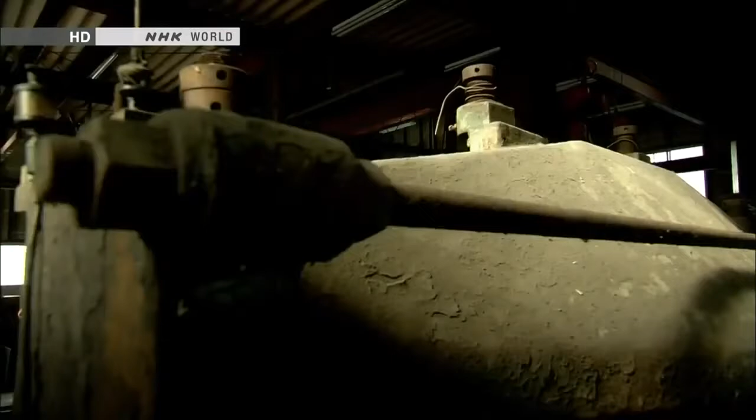In a workshop near Mount Fuji, a curious being has appeared. It's 3.8 meters tall and weighs 4 tons. It is a giant humanoid robot named Kuratas.

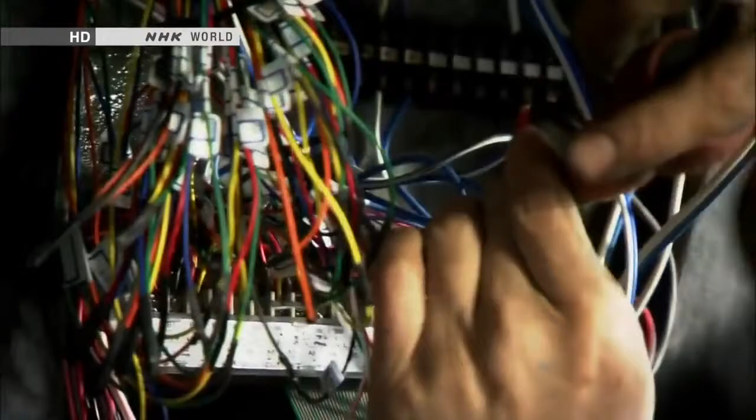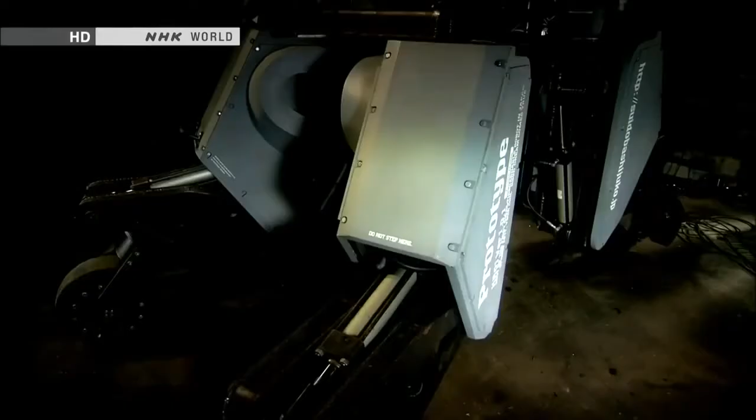Kuratas is a contemporary artist's creation. He holed up here for 2 years, building the robot with input from an expert. He calls Kuratas a work of art, but it's a sophisticated piece of machinery. A person seated inside can control the robot, move its limbs, and grab things. The artist says he was inspired by robots in science fiction tales and animation. That vision sustained him as he worked in solitude.

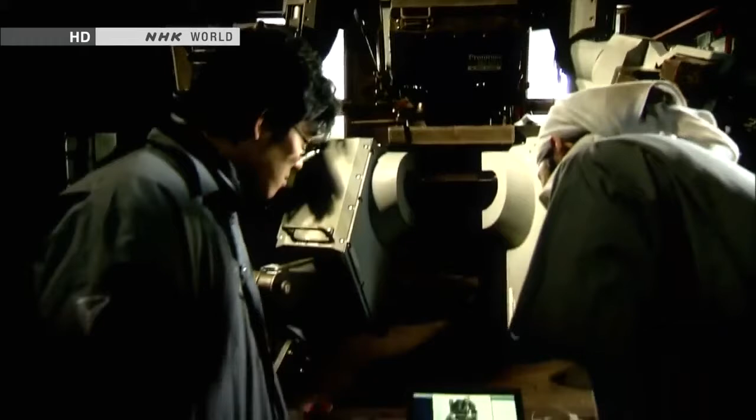Things that were once unthinkable are becoming real. How will robots evolve? Well, military applications could be one option. They'll probably become more and more like humans. They could surpass us in strength and ability.

People long dreamed of creating these extreme machines. Now, humanoid robots are here. They think like we do, move like we do, and even sacrifice themselves for us.

We want our robot to change society, because robots must be useful. Electronics and computing, progress in vision systems, there's many pieces of it. We will see much more capability continue to grow.

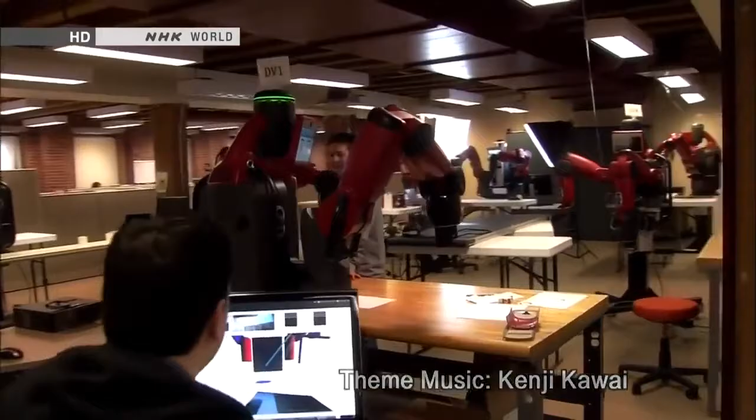Since the Industrial Revolution, people have entrusted some jobs to machines. But there may come a day when humanoid robots do much more complex jobs. Then, what will people do?

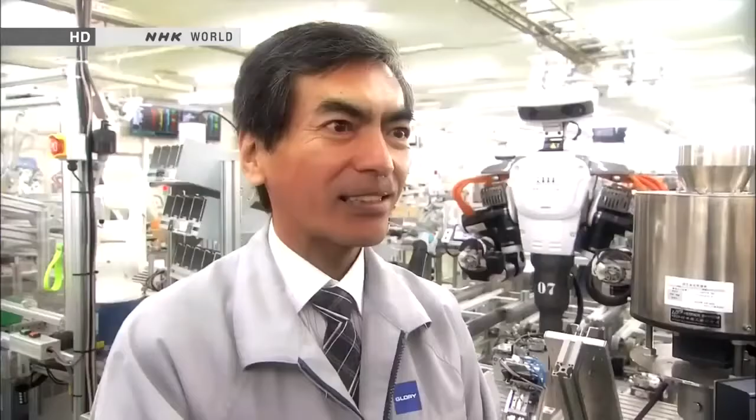You'll see more and more robots doing things in society, whether it's manufacturing or service applications or home healthcare applications. The key will be skillfully dividing labor between humans and humanoid robots.

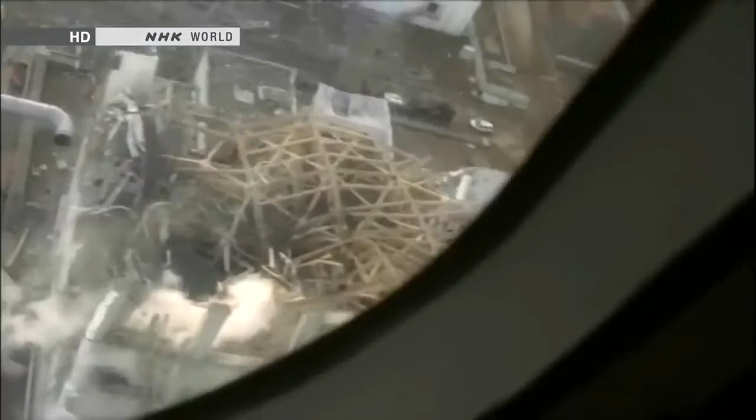The disaster that hit Japan in March 2011 accelerated efforts to develop robots with human traits. The Fukushima nuclear accident left people powerless.

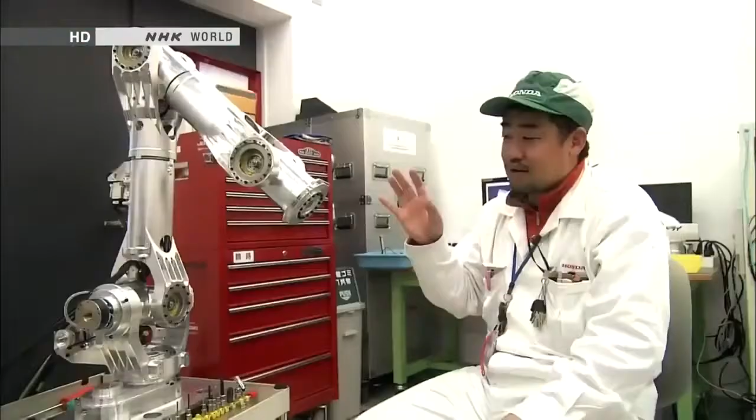By joining forces, we can make a truly useful contribution. Only a humanoid could do it. Or the day will come when robots will really assist mankind. The nuclear disaster in Japan sparked explosive advances in humanoids at the front line of robotics development.

This program explores the future that's fast approaching.

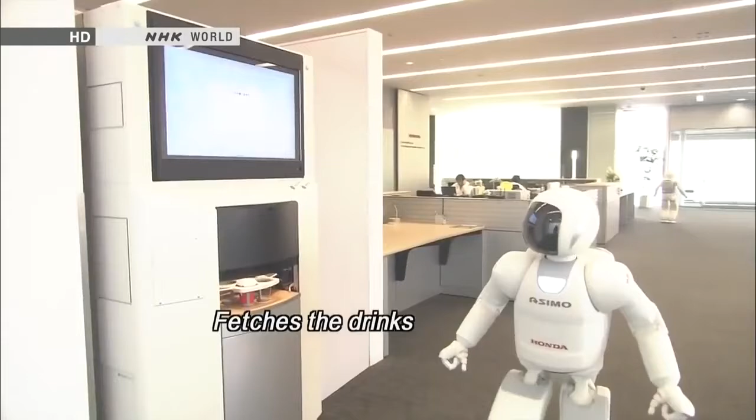Asimo was created by Honda's research and development subsidiary. We were allowed to film their top-secret robotics laboratory.

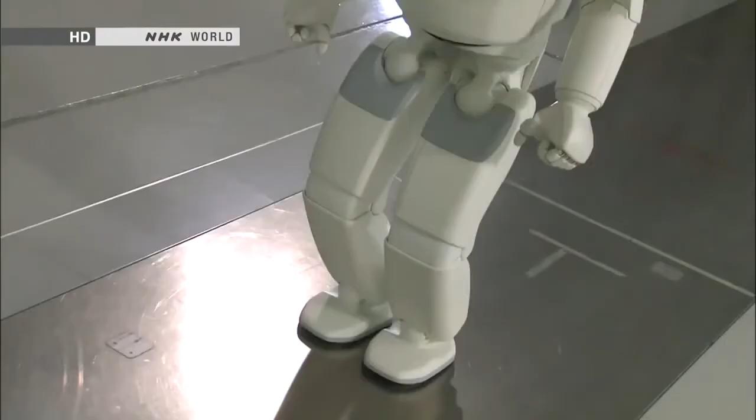Japan is a worldwide leader in the development of humanoid robots. Asimo is the country's crowning achievement. Engineers continue to make improvements.

Asimo's most innovative feature is its advanced intelligence. The robot can think and act on its own without human intervention.

That's made possible by sensors that replicate our 5 senses.

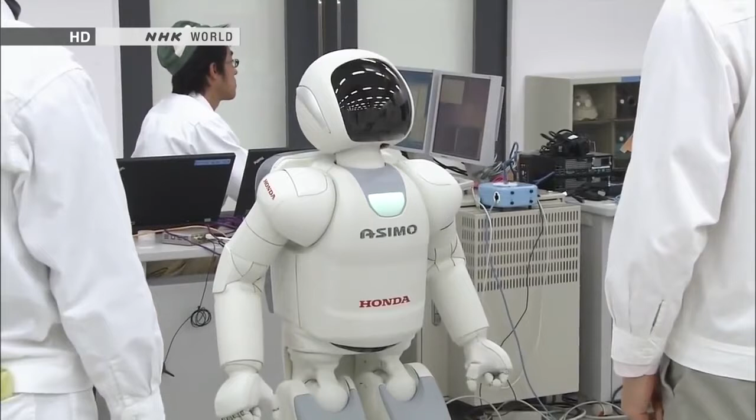It uses them to listen and engage in conversation.

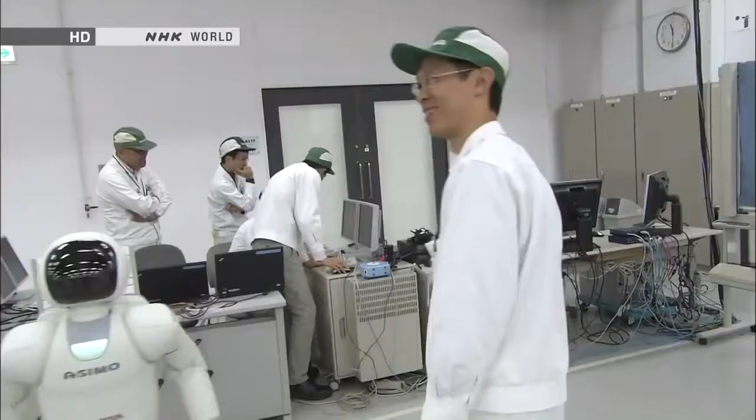2 cameras work as eyes. They can detect humans and use stored data to identify them.

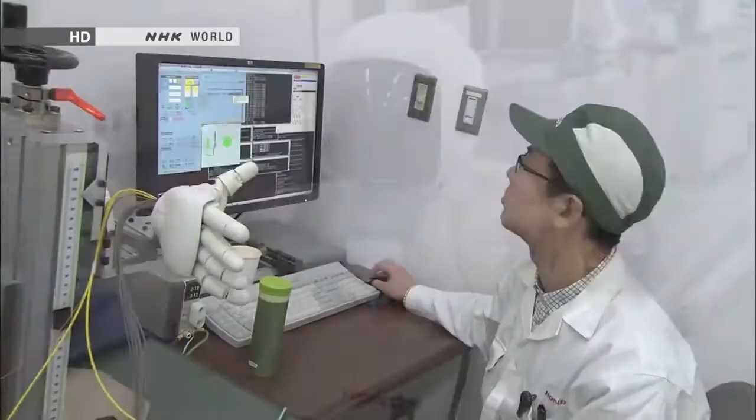Asimo also has a sophisticated sense of touch. Its fingers can make subtle movements, like a person's. Sensors are embedded in the fingertips, too. They can gauge the hardness of an object, like human fingers do.

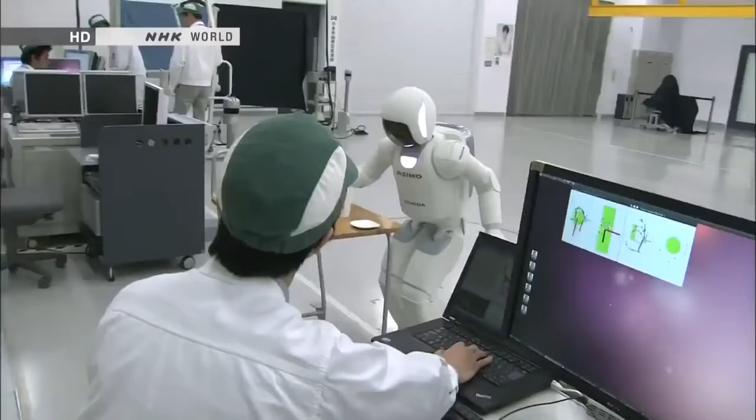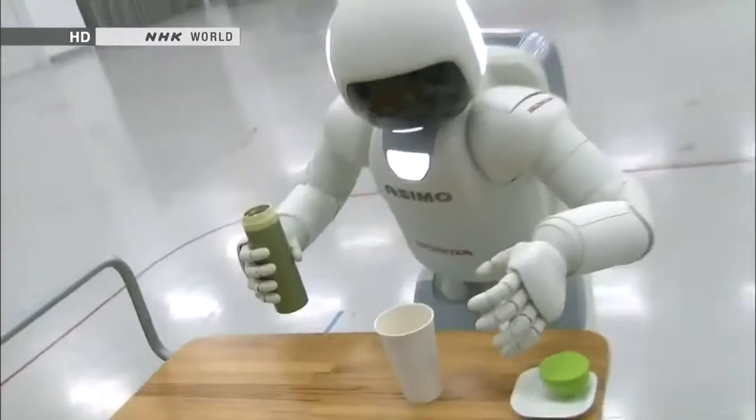Most robots use a fixed amount of strength to grab things. But Asimo exerts more power to open a tightly sealed water bottle and less when holding a paper cup. Its artificial intelligence uses information from the fingertip sensors to adjust the grip.

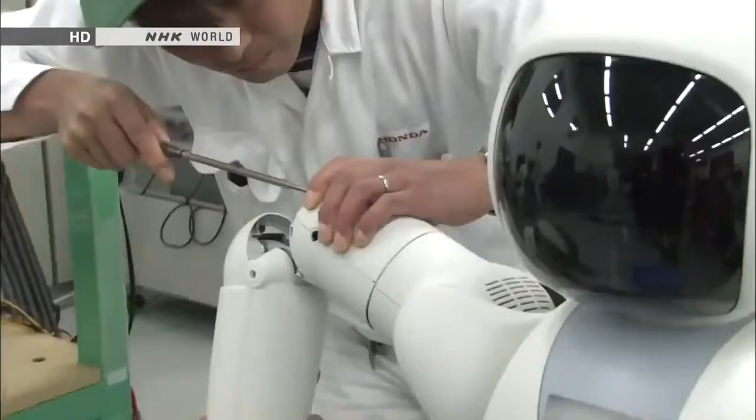The developer's ultimate goal is for Asimo to be a valuable partner that coexists with humans. The engineers who created Asimo all grew up watching animated shows about robots, such as Astro Boy, Doraemon, and Gundam. They dreamed of someday making their own.

Satoshi Shigemi is the development team's leader. He has been designing robots for the past 16 years.

From the beginning, we wanted to design a robot that could help people. To realize that dream, we're constantly asking ourselves what kind of robot would be able to change society, make people happy, and make life easier for people around the world.

Our idea is to create a robot that will change how people live. We're working through the technological issues one by one in order to reach that goal.

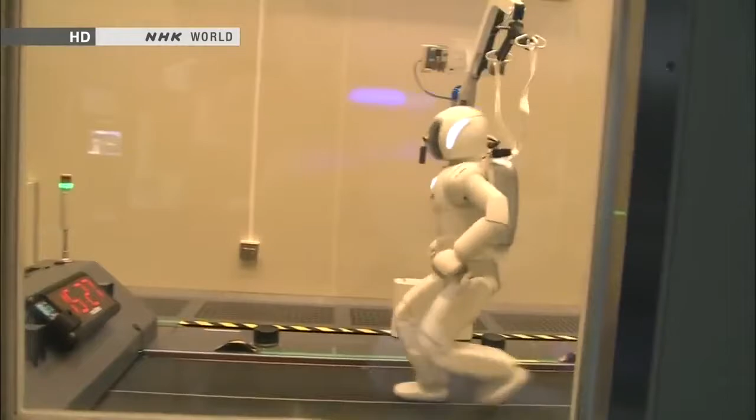Asimo's advanced physical capabilities are revolutionary. The robot can walk and run. It can reach speeds of up to 9 kilometers an hour.

For robots, walking is much easier than running. When running, both feet momentarily leave the ground. Balancing in midair is no easy task.

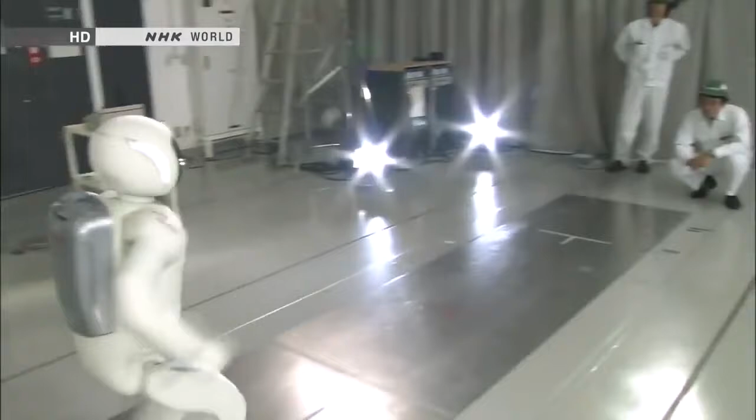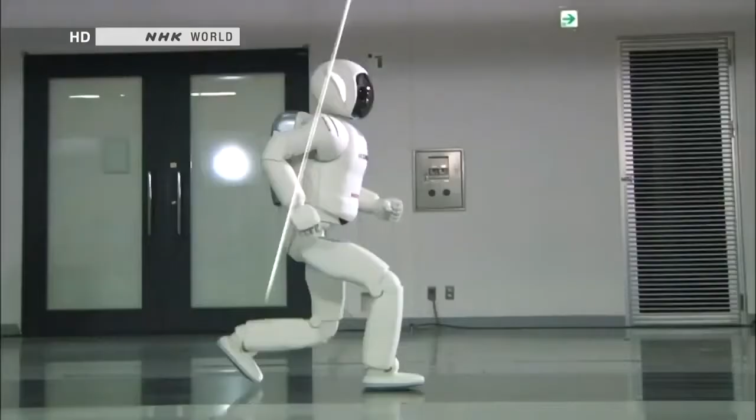Maintaining posture while jumping or floating in the air was a major technological breakthrough. Asimo leans its upper body slightly forward to maintain overall balance, going forward straight in the air. Sensors in Asimo's waist measure the robot's angle, and it leans slightly to compensate, forward or back, side to side. That's how it stays perfectly balanced in the air.

Asimo has been evolving ever since development began in 1986, much like a growing child. But something happened that made researchers realize Asimo's real-world limitations.

It was the accident at Tokyo Electric Power Company's Fukushima Daiichi nuclear plant. The damaged reactors released radioactive substances, making it difficult for humans to deal with the crisis. People needed something that could confront the dangers and bring the plant under control. Robots.

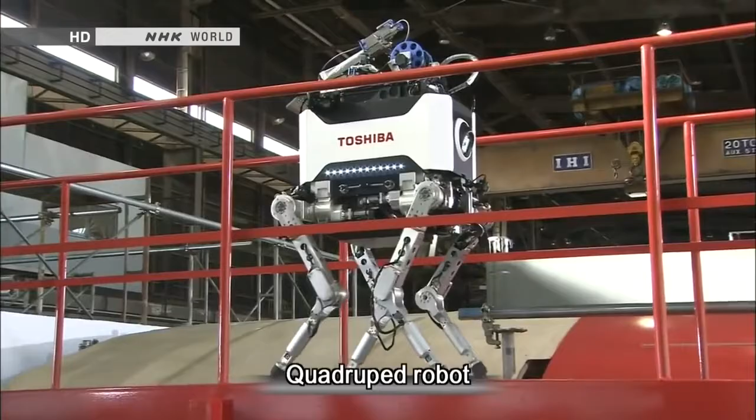Japanese officials sent a request for robots developed by the US military. Then, a variety of Japanese robots have been enlisted as well. Robots have proven to be useful, but 2 years after the accident, they're only used for inspections. They're not able to do all the work of humans.

What about Asimo? Right after the disaster, people flooded Honda with phone calls and emails asking the company to send Asimo to the Fukushima plant. But Asimo wasn't up to the task. It could move nimbly over an office floor and other flat surfaces, but large vertical gaps and obstacles were a different story.

We heard from many customers. We ourselves regretted that Asimo couldn't be of help. It was obvious that Asimo we had built wasn't ready for real-life action. We realized right away that we needed to make something different, something new that could offer immediate assistance.

Honda wasted no time. Company officials offered to create a robot free of charge to assist TEPCO in the recovery. TEPCO accepted. Officials asked for a robot that could open or close valves inside the nuclear plant. We wanted to flush out radioactive materials that remained inside the pipes and bring down radiation levels in the facility. That was our first goal.

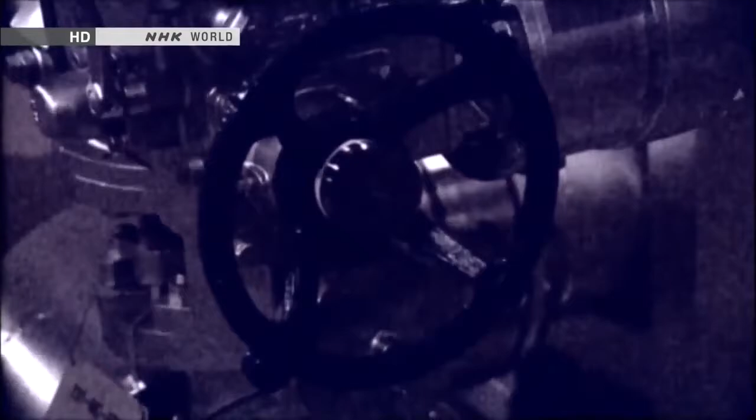Unless we opened or closed the valves, the area would remain highly radioactive, and that would prevent workers from entering the facility and impact the entire decommissioning schedule. How many valves are there? Each unit has from several thousand to tens of thousands of them.

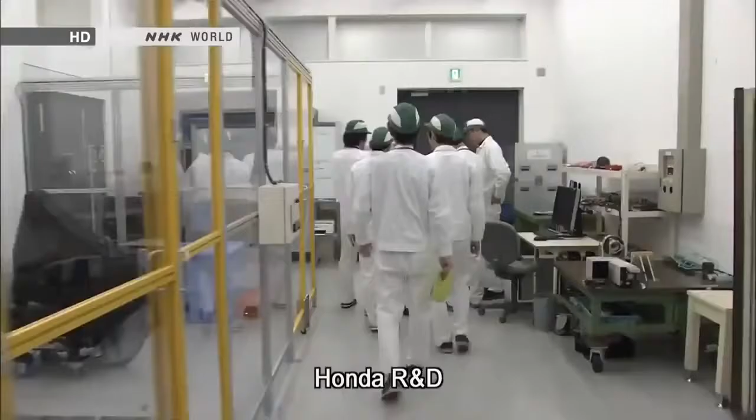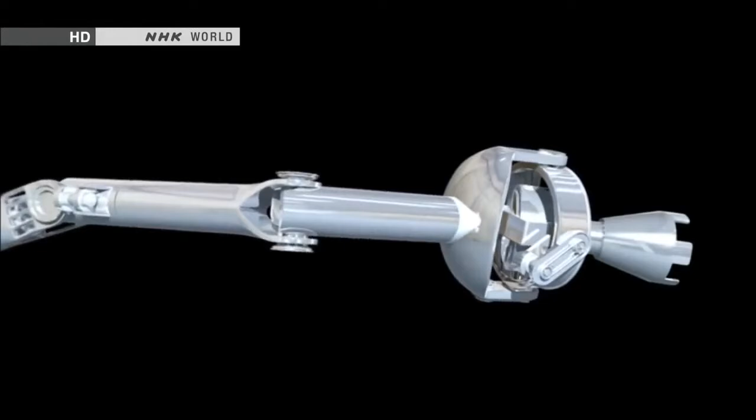In July 2011, 4 months after the accident, Honda began designing a robot for use at the nuclear plant. Members of the Asimo team were put in charge of the project. A humanoid robot would take too long to build, so engineers focused on making a robot specifically for operating valves. Asimo was crucial to their efforts. Its ankles employ advanced balancing technology. Developers reasoned that using it would allow the new robot to work inside rubble-filled reactor buildings.

The team worked exceptionally fast, completing a prototype in just 4 months. They turned Asimo's leg into an arm for operating the valves. Even when the base moves, the arm remains steady. So far, so good.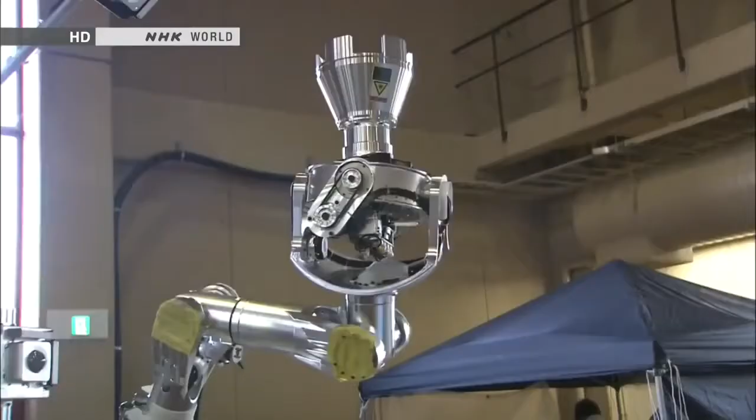Officials from TEPCO evaluated the prototype at the National Institute of Advanced Industrial Science and Technology. The government-backed group for cutting-edge research contributed to the development effort. A TEPCO official couldn't take his eyes off the robot's movements. We may be quite demanding. That's okay. We might be quite direct.

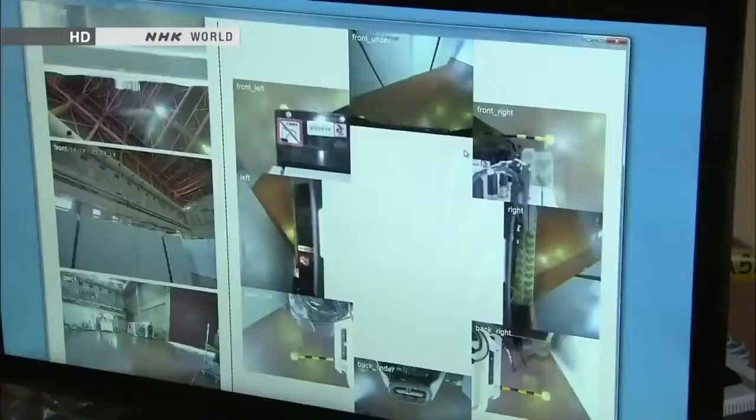The test is designed to replicate conditions inside the nuclear plant. The robotic arm is remote controlled. Testers send the arm toward one of the valves. There are a number of unknowns, including the condition of the valves. They may have rusted since the accident. A valve might break if the robot applies too much force, or it might not budge at all.

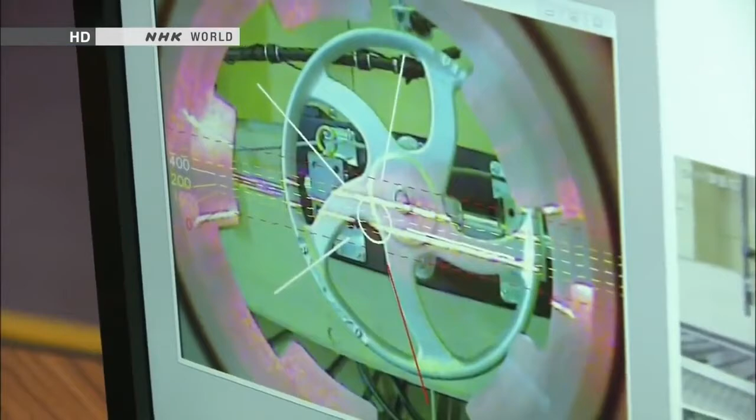The robot uses just the right amount of force and turns the valve on the first try. It's passed the test. This robot can do more than inspections. It could help in the recovery effort.

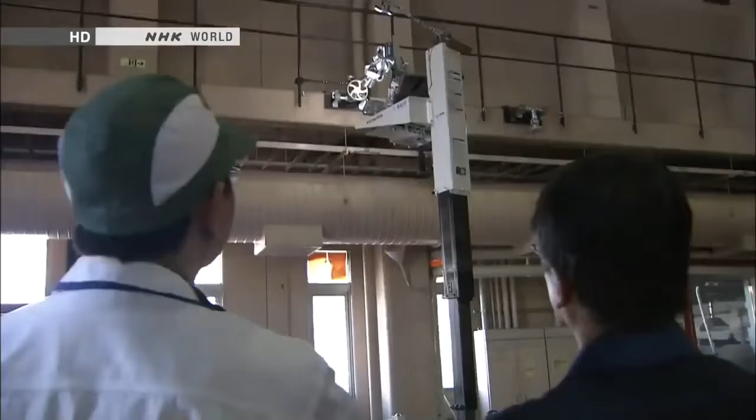From what we've seen, the robot seems near perfect. We want to use it as soon as the need arises. It's important that we quickly do what we can to make that possible.

The Fukushima accident also encouraged U.S. developers to design emergency response robots. Department of Defense officials have spearheaded the effort. Before, they had shown little interest in humanoid robots. Now, they view them as vital for disaster response.

The architect of the new strategy is Gill Pratt of DARPA. He oversees funding for leading-edge research at the Department of Defense. There are many aspects of disaster response in Fukushima that inspire people in robotics to work on new capabilities. If they were able to take action during those first 24 hours, then the first reactor maybe would not have blown up, in an environment that is too dangerous for a person to do.

And what's important to us is that the robot is compatible with human environments, compatible with human tools, and also compatible with human operators without special training. As a result of that, the easiest form that comes to mind is the human form. DARPA is backing the development of a humanoid robot for catastrophes, such as nuclear power plant accidents.

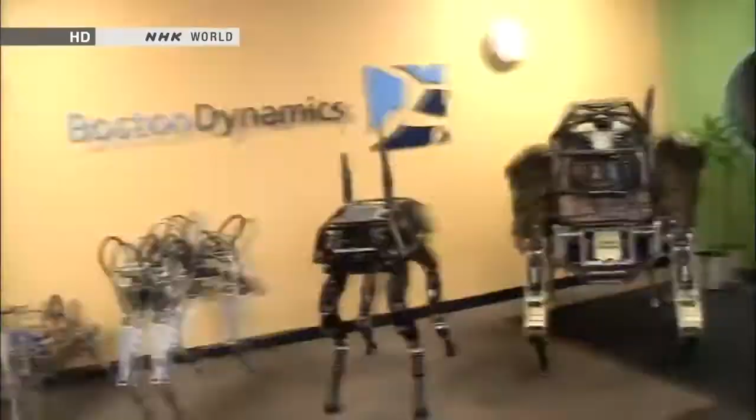This company is leading the development work. It has already built several military robots. Okay, I'll show you the current status of the robot.

This is the first American-made humanoid robot for disaster response. It's called Atlas. Before, U.S. designers had focused on robots with specialized functions.

Why the sudden interest in humanoid robots? Traveling over debris, prying open valves, using tools for repairs—performing multiple tasks like these is impossible for specialized robots. Crises also require robots that can navigate doors and stairs. Humanoid robots are ideally suited for such situations.

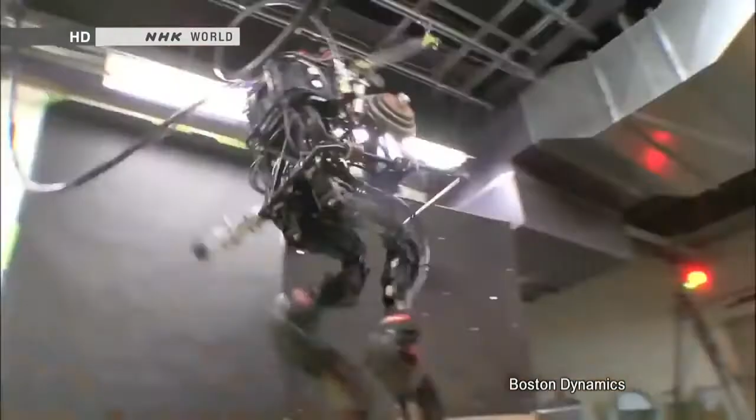Tests of this prototype were going smoothly. It can easily climb stairs and jump from a height of nearly 1 meter, and negotiate obstacles using its arms and legs. It can already handle more demanding environments than Asimo can.

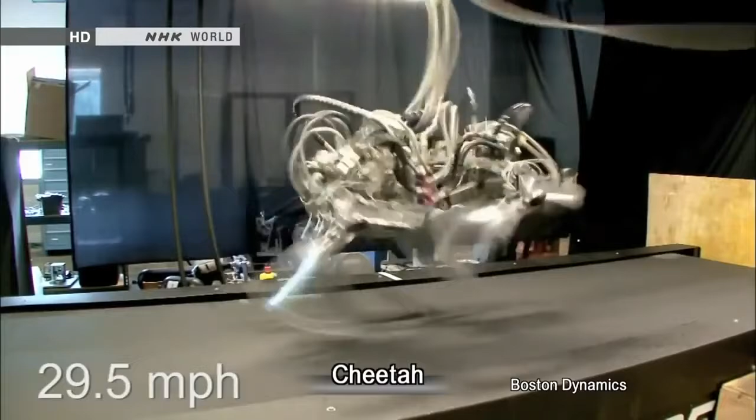Atlas is loaded with technologies originally designed for military robots. A quadruped robot called Cheetah can race through a battlefield at 50 kilometers an hour. LS-3 is for transport—it can carry heavy supplies for soldiers.

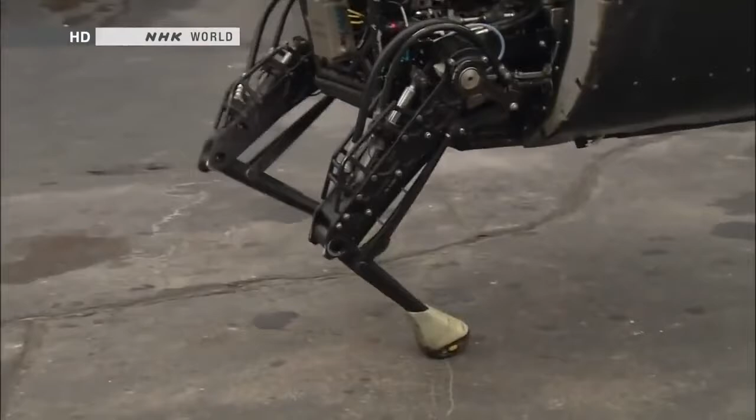The ferocious-looking robot gets its strength from a powerful hydraulic drive system. A hydraulic device can be small, yet quite strong. The black cables convey hydraulic power to the legs, generating the brute force required for harsh conditions on the battlefield.

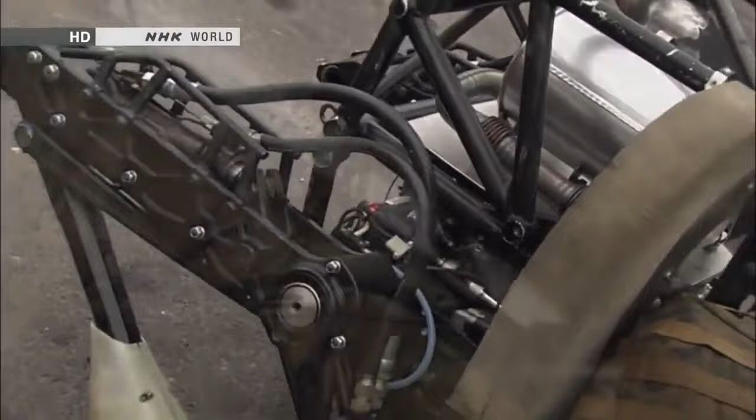A web of hydraulic cables covers Atlas's body. They form a muscular suit of armor for clearing debris.

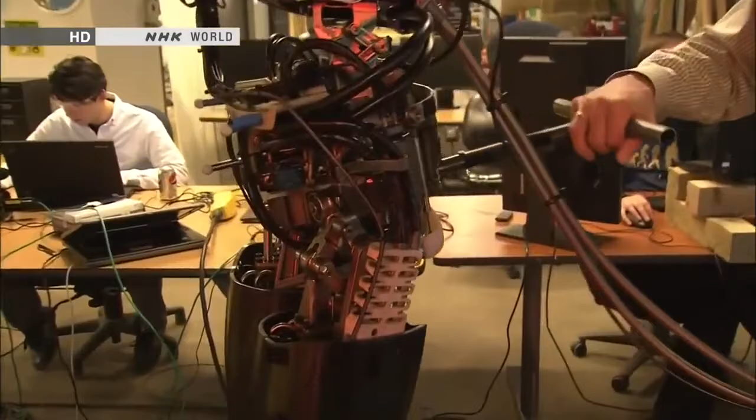Another important technology comes from military robot engineering. This machine's joints have a wide range of motion, allowing for flexibility that humans can't achieve. Atlas's joints are capable of moving in 28 different ways. Atlas can crawl through narrow spaces and withstand sudden shocks.

But then we have the knee—this has 3 degrees of freedom in the hip, just like us. This way, and then this way. I am very impressed with the number of degrees of freedom. It will be able to do these human-compatible tasks without a lot of the limitations that other robots have.

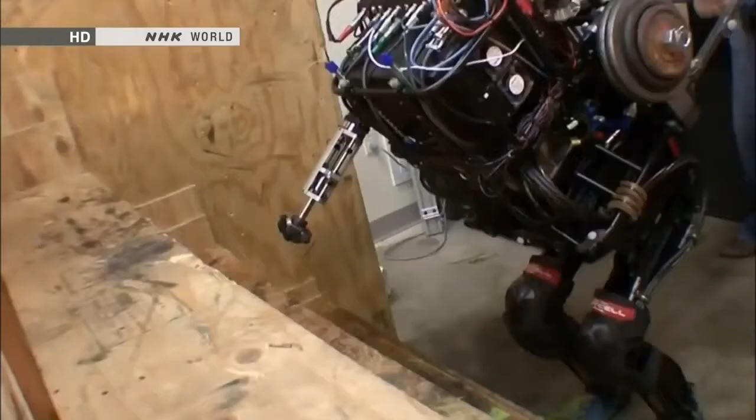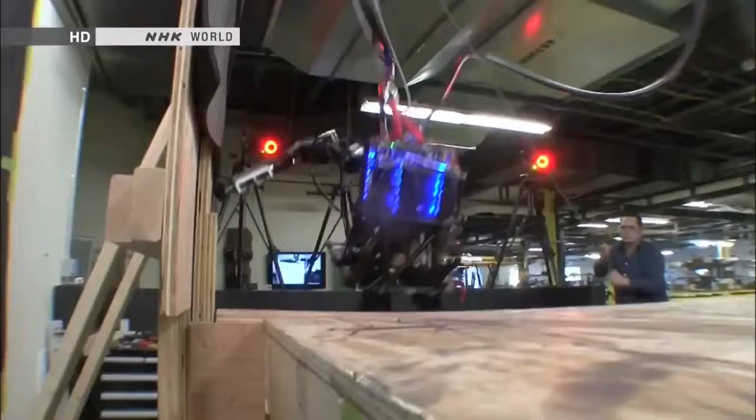Engineers will combine Atlas's rugged body with sophisticated artificial intelligence that's almost near completion. They aim to complete the robot by December of next year.

One reason you see humanoid robots is because there are some people working who are really interested in robots as an entertainment thing or as a performance thing. I think that's different—we're much more interested in basic capabilities for emergency response and rescue. So I don't think Asimo has been designed to do those things yet.

U.S. engineers stepped up their efforts to develop humanoid robots after the nuclear accident in Japan. Japanese researchers are embracing the same mission.

In November 2012, robot engineers from around the world gathered in Osaka for an international conference on humanoids. Gill Pratt from DARPA was one of the participants. He came to invite engineers to join a project sponsored by the U.S. Defense Department.

Okay, March 11th. After 24 hours, if only a robot had been there to go and open that valve, the entire disaster could have been averted. But we didn't have one, and furthermore, we didn't have anyone that could do the job. So shortly afterwards, we actually started planning the DARPA Robotics Challenge.

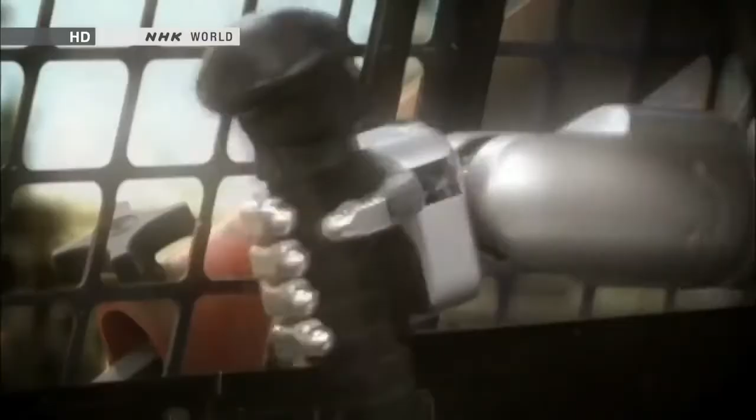The challenge consists of 8 tasks: driving a vehicle to approach a disaster site, walking over rubble, removing obstacles, opening doors, using tools to break down walls, climbing ladders, turning valves, and making repairs.

A single robot must complete all 8 tasks. The development period is 2 years. DARPA will provide contestants with funding of up to $4 million.

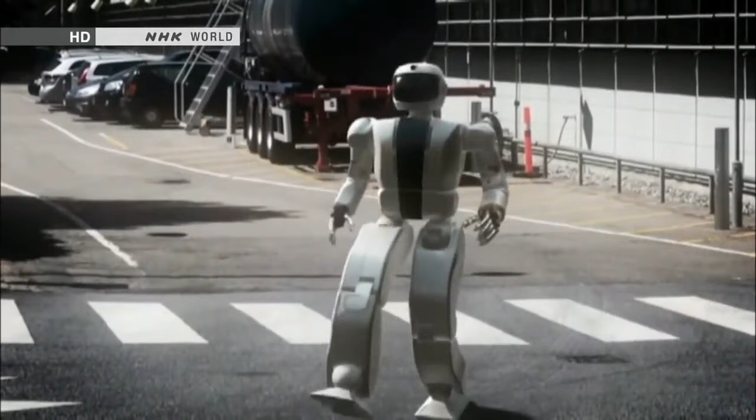DARPA has received over 100 proposals from research groups worldwide. They include renowned organizations like NASA and MIT.

Japan is at the forefront of humanoid robotics engineering, yet its researchers hesitated to throw their hats into the ring.

So actually, to me, it's difficult not to see that some of the results of DRC are going to be used to advance, as you say, advanced military technology. The DRC is about developing robots that I believe wholeheartedly are completely impractical for military purposes, for offensive military purposes.

Will the technology that we come up with find its way into military systems? Probably yes. But I guarantee you that if you work on a robot for healthcare, there's a chance that that technology will also find its way into military systems.

The members of one Japanese research institution wanted to take part in the competition.

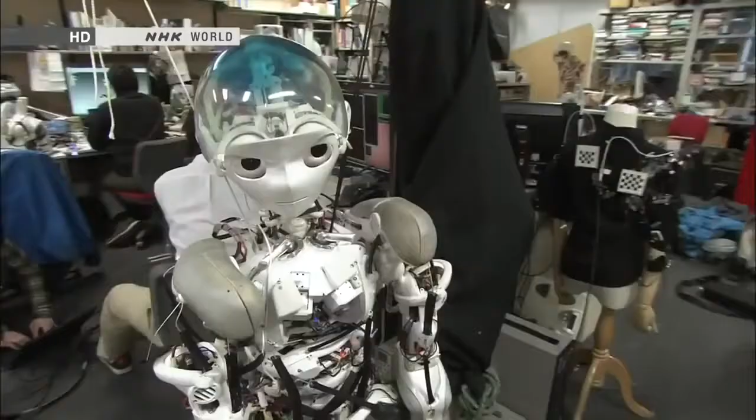They worked at the University of Tokyo's robotics lab. Researchers there, along with those at Honda, are global leaders in robotics engineering. But they faced a major obstacle to competing: the university bans military-funded research.

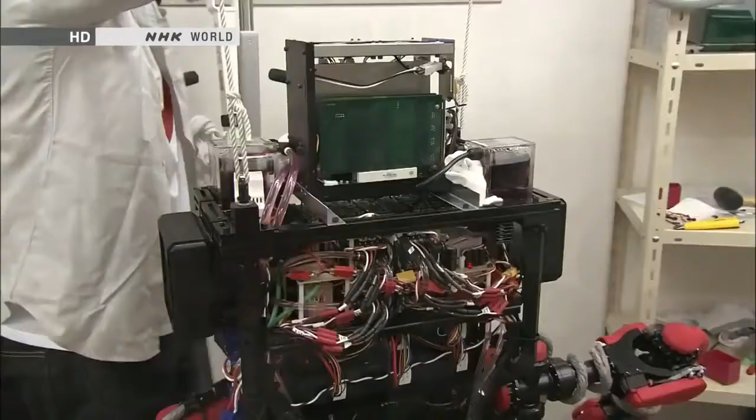Two researchers made a decision. They told the university they were leaving. Then they decided to set up a venture company and enter the DARPA Robotics Challenge. They couldn't shake the feeling that they should leave their quiet university lab and help resolve the nuclear crisis.

Six months after launching their venture, the team had just completed a prototype with help from university graduates. Its long arms can exert 10 times more force than those of conventional humanoid robots. It's too tight to turn with one hand, but it can easily turn a valve that's too tight for a person to turn. The strong force comes from a large electric current that pushes the motors to their maximum limits.

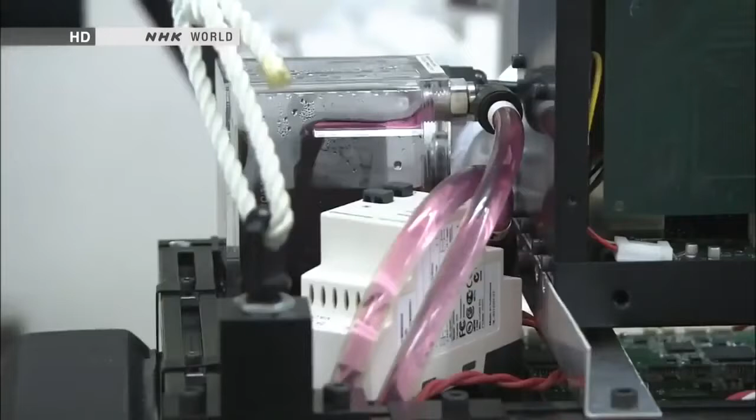A reddish fluid circulates through the robot's body. The fluid serves as a coolant that keeps the motors from overheating. The cooling system should enable the robot to perform hours of grueling work at disaster sites.

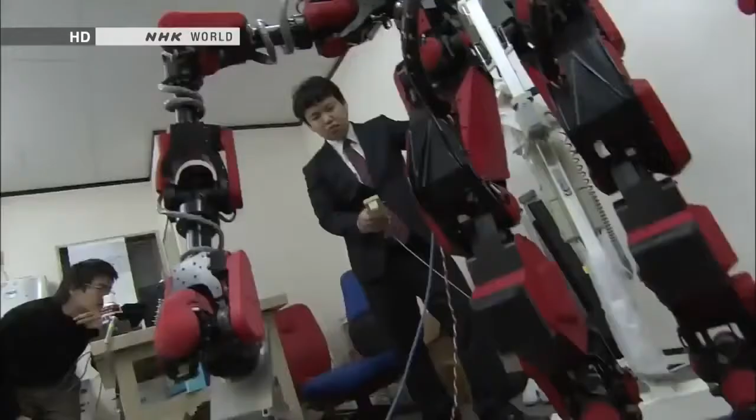The time has now come for the developers to apply their years of research to the real world. A nuclear crisis has happened here in Japan. Radiation is escaping. Researchers in every field must wonder at least once if the technology they've been working on could help resolve the crisis. By joining forces, we can make a truly useful contribution. It's with this in mind that we decided to enter the competition.

One country is quickly catching up with Japan in humanoid robotics: South Korea. KAIST is a government-funded lab for the advancement of science and technology. Researchers there were among the first to express interest in DARPA's robotics challenge.

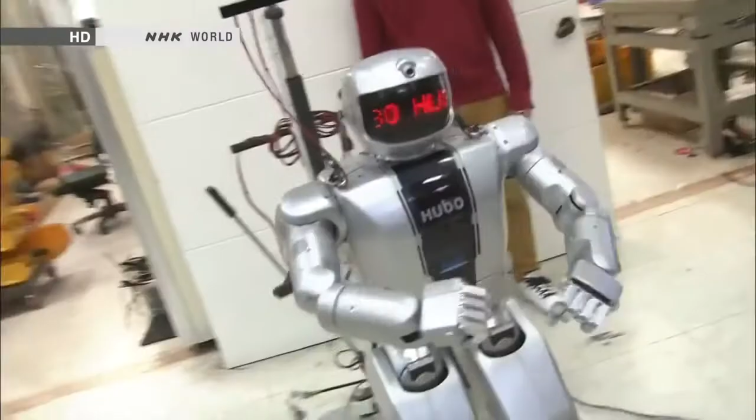This humanoid robot is called Hubo. It's modeled on Asimo, which Honda spent 14 years developing. Hubo was built in just 5 years. Hubo deftly manipulates its hands, and it's also good at dancing. Its moves look just like Asimo's.

Hubo has been undergoing a major upgrade ahead of the competition. It can now bend backward at the waist while walking to handle all kinds of environments. It can quickly pick up tools. The tests were going well.

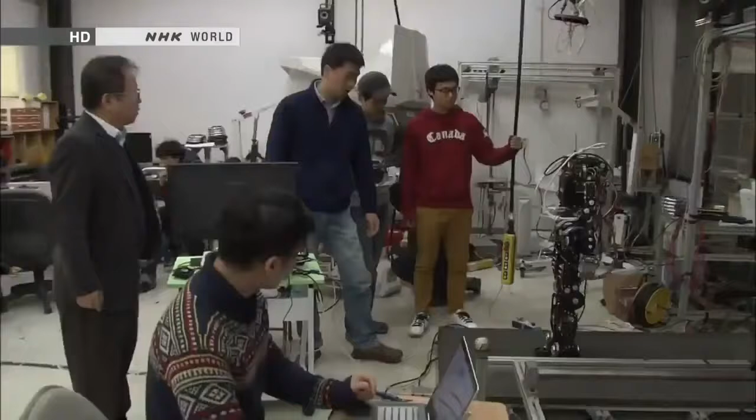People have always compared Hubo to Asimo. Engineers now had a strategy to get ahead of the Japanese developers. They decided to publish certain details about Hubo's design and pursue joint development with researchers at other institutions. One could say that this space inside Hubo's chest captures the heart of their thinking.

It's empty now, but this is where artificial intelligence will be installed. It's removable. Hubo does not yet possess artificial intelligence. Its motions are as sophisticated as Asimo's, but Hubo's movements are all pre-programmed. U.S. universities that lead research into artificial intelligence will develop a brain for Hubo. The stage has been set for a joint U.S.-South Korean team to compete in the DARPA Robotics Challenge.

Sharing is the key to making technological advancements. That's true in South Korea and in other places too. Research shouldn't be confined to one place. People developing humanoid robots elsewhere are too close-minded.

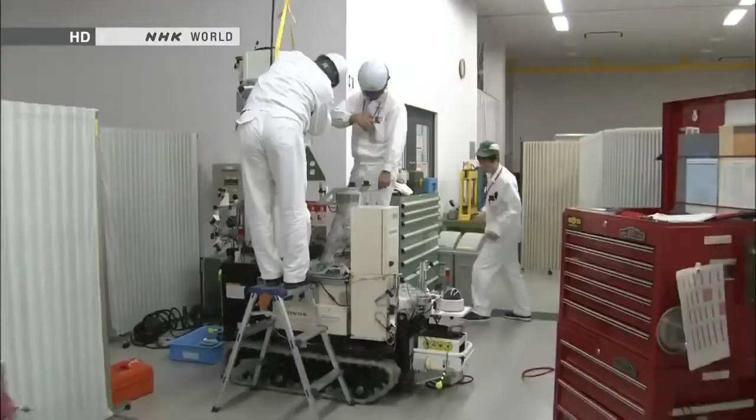Researchers at Honda were also invited to enter DARPA's competition, but they declined. Their energies were focused on designing a robot to tackle Japan's nuclear crisis.

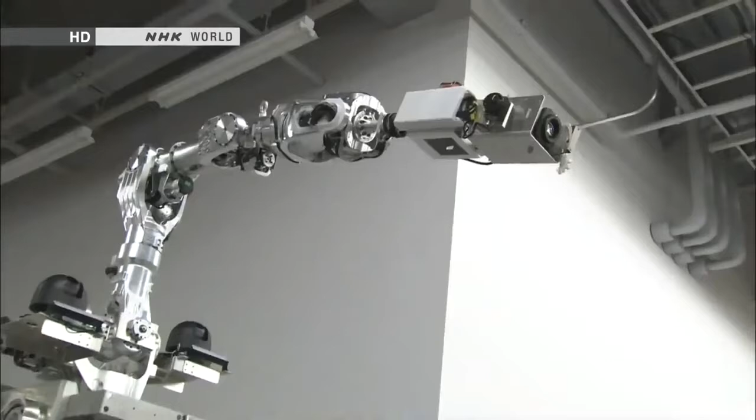Nearly a year has passed since Honda's robotic arm passed evaluation tests, but the device has yet to be deployed to the nuclear disaster site. That's because officials at TEPCO requested a change in specifications. Engineers have replaced the valve-turning hand at the end of the arm with a camera.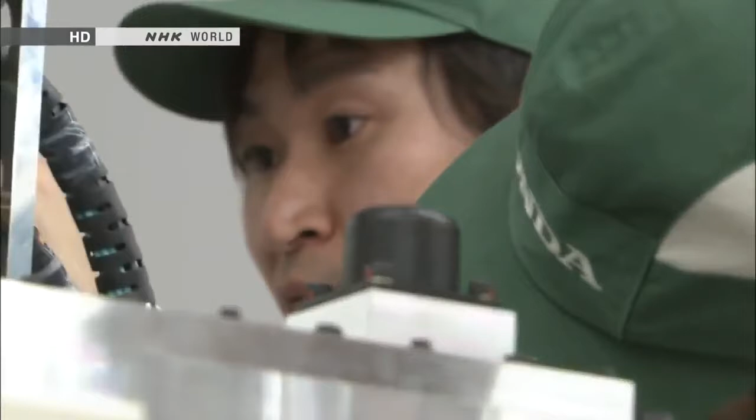TEPCO had changed its plan. Officials decided to put priority on assessing conditions inside the plant's facilities. They said it was too early to have robots work on valves. There wasn't even a recovery plan in place when we were working out the valve manipulation tasks.

The robotic arm will soon be sent to the accident site. It will provide the first images filmed from high up. The robotic arm was not the end of Honda's efforts. Its engineers had another secret mission.

They would develop a new humanoid robot, an updated version of Asimo for use in disasters. The site where the Fukushima disaster took place is dark and off-limits to humans. Only a humanoid robot with both intelligence and motor skills could climb over the debris, get to the accident site, and perform the work of people. In other words, a robot like Asimo.

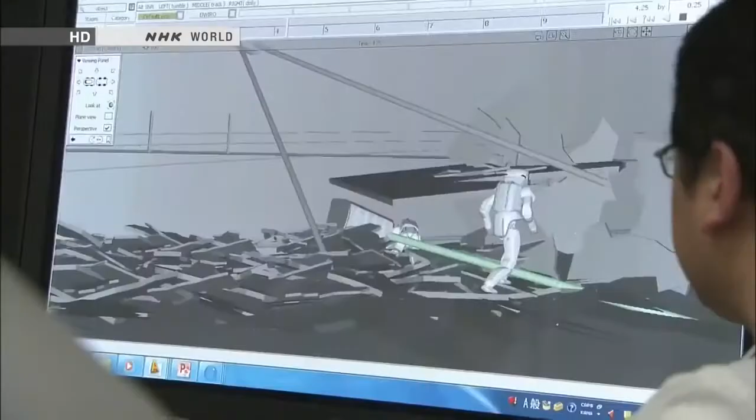Honda's engineers began developing robots in 1986 with the goal of making people happy. 27 years of research is now being put to the test. As we saw in the Fukushima Daiichi crisis, the bottom line is that robots can stand in for humans in places that we can't go to, or that are too dangerous. I am committed to delivering what's needed, when needed, in the shortest amount of time.

The accident in Fukushima spurred the development of humanoid robots around the world. The disaster also prompted people to question the roles of humans.

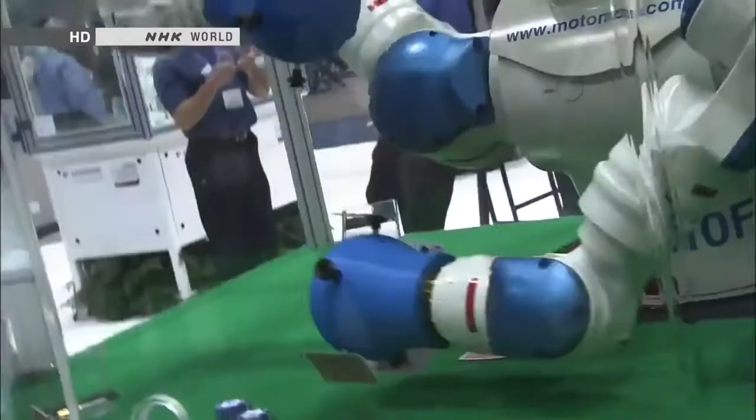One of the largest industrial robot events took place in November. Global manufacturers displayed their latest models. Companies are developing more and more two-armed humanoids for industrial use.

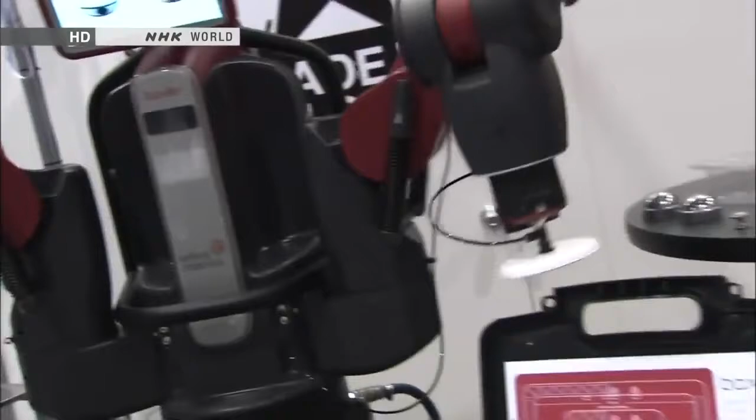One new product at the event caught a lot of people's attention. Baxter was created by the inventor of a best-selling cleaning robot. It's equipped with sophisticated artificial intelligence and is designed to work side by side with people in factories and other settings.

The robot's most unusual feature is its ability to master a task in a matter of 5 minutes. All that's required is step-by-step manual instruction. No complicated programming is needed.

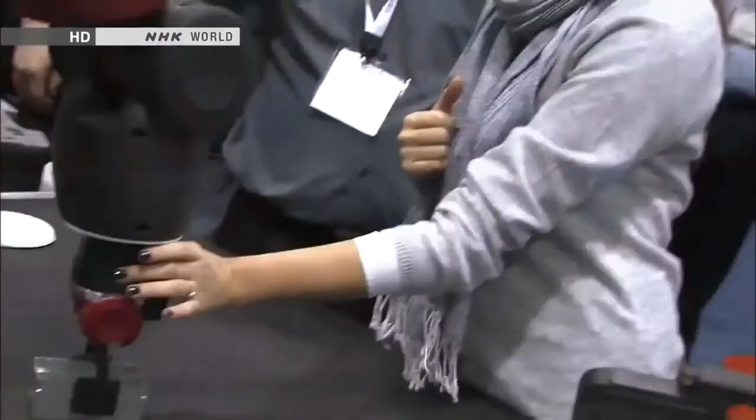Let's pick up this part. So you bring the arm to the part. Yep, just like that. So we have the part. Close the grasp. Yep, grab the arm and bring it to the table.

So you just pick. I did a pick and a place. And at this point, you're already able to do the task. So if I can move that over there, it's going to look for the object.

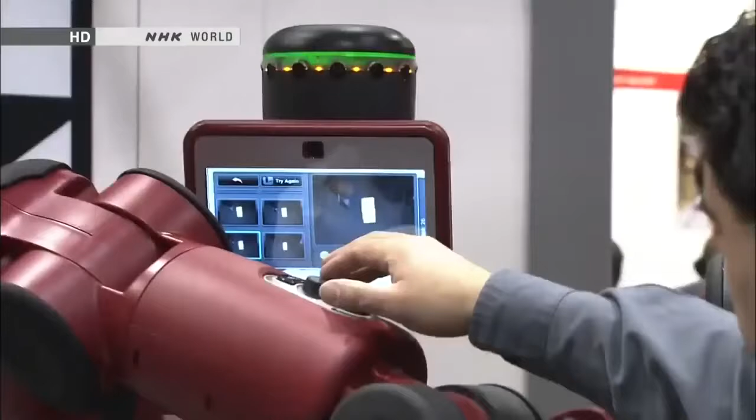The expression on the face on the LCD screen shows whether or not the robot has understood the task.

Baxter costs $22,000, a bargain for a humanoid robot. The maker says buyers can recoup their investment in several months and slash labor costs.

I'm very impressed with it. I work for a small manufacturing company, and we have some older employees who are looking to retire. There's some tasks that Baxter could do for us very effectively, plus it would be cheaper than employing a person. It's not going to get tired, it's not going to need to stop. It'll keep running while everybody else is taking their lunch.

The Boston-based manufacturer has a flood of back orders.

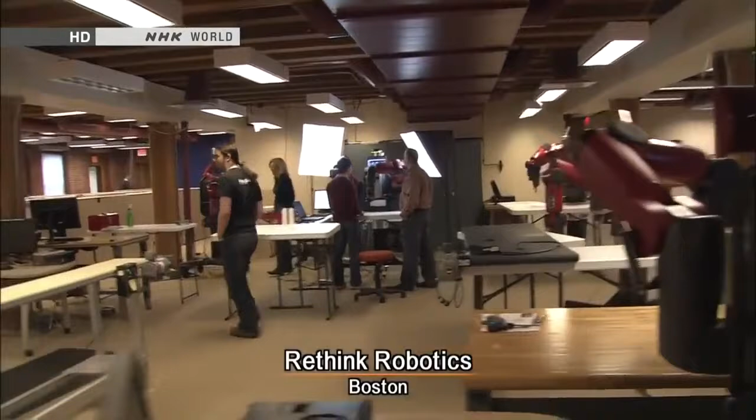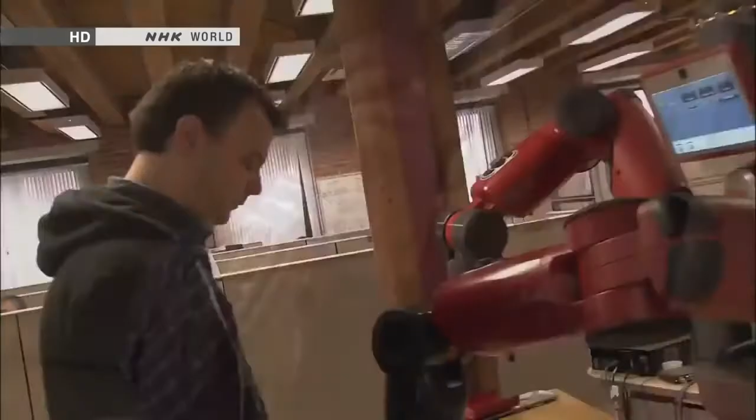Officials say someday Baxter will work at places like coffee shops, taking orders and grilling burgers. Eventually, they expect to have 500,000 U.S. customers.

Today we're focused on manufacturing, and there's a very big opportunity in manufacturing. But there's lots of other places that a robot like Baxter could go. We had the Industrial Revolution at the turn of the last century. We've just gone through the computer revolution, effectively at the turn of the most recent end of the century. We are now into the robot revolution.

Will people and robots someday compete for jobs?

At 8:30 one morning, a group of new employees takes part in daily morning exercises. They are 13 humanoid workers called Nextage. This company began using the robots in earnest last year.

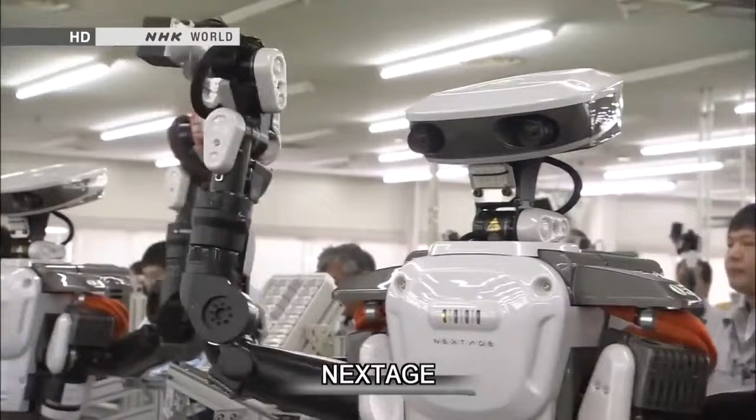They have 2 eyes and are just like humans. They're cute.

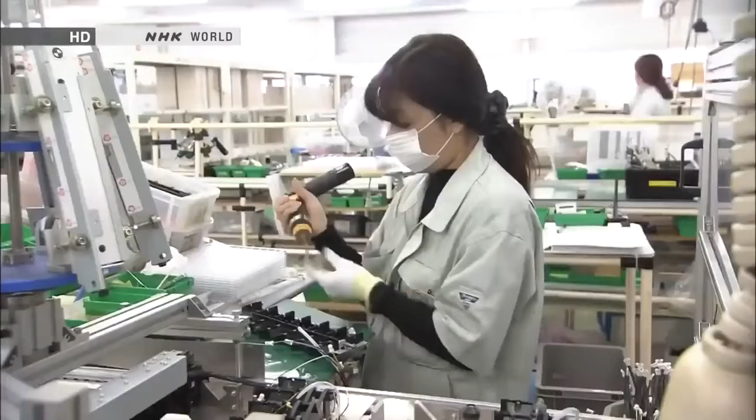This factory manufactures money sorting machines for cash registers. The humanoids work on a production line that was previously manned entirely by humans. The robot visually confirms the parts set in place by a human worker, then it begins its task.